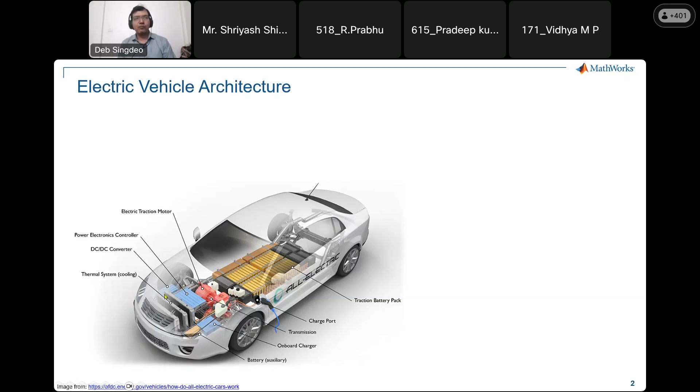Interestingly, one thing we are also looking at is that it's not just modeling the components themselves, but also trying to see how the whole energy is actually transmitted through each and every component — so not just modeling the component, but also looking at how we can model the thermal and other aspects, which are very important to understand the overall performance of the vehicle.

If we represent it in terms of the different subsystems which are there, whatever we talked about now is related to this particular subsystem. We have motor, power electronics, battery, cooling system, but the vehicle dynamics will come specifically from the modeling of the forces acting on the vehicle. That is what we will be looking at today.

Overall, the best way we can test it is to actually create a system level model. Not just the vehicle — we have to combine it with a controller. We should have a model of a driver, and then either we can go with drive cycles, which means that when you take a particular vehicle on the road, it will have a certain velocity characteristic, so that relates to the drive cycle.

In many cases, if we're working with particular test scenarios, we can have those integrated. If we're able to build a model at this level of detail, only then will we be able to capture the system level performance of the vehicle. If we miss out on any of the particular components, chances are that will reflect in the overall performance.

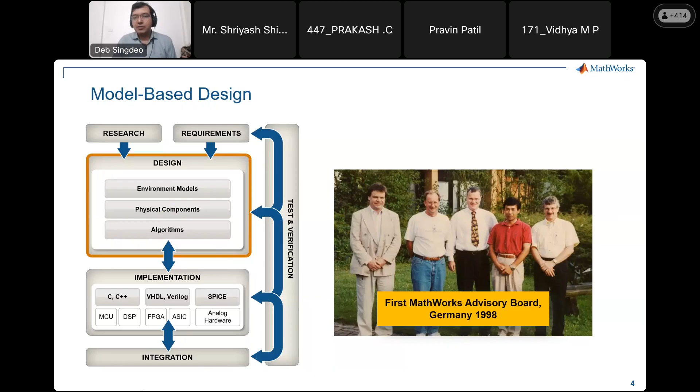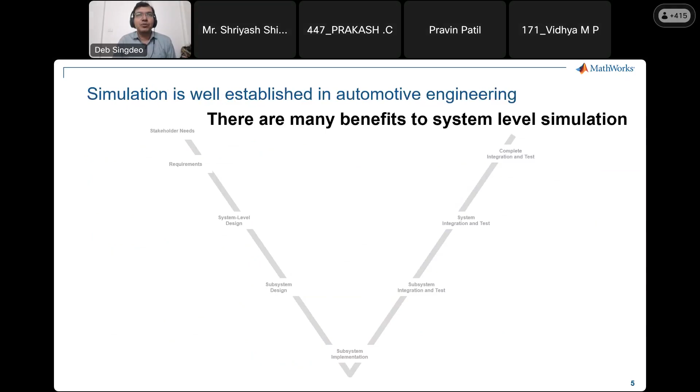What other benefits are there? There are some interesting benefits when you have system level simulation. This is what industries have been telling us. As of now, what I have is the V model, which many industries actually follow. Some of the things is that you are able to understand how a particular system actually behaves. Then we are also able to evaluate different design alternatives. It's not always that one design would be optimal - we can go with different sizes of capacitors, different sizes of inductors. So we can evaluate different design alternatives. Thirdly, we can actually optimize the entire design. Why? Because we are doing system level simulation, and whenever we optimize a design, we just don't optimize a component - we are trying to meet certain overall performance. So that is very important that we do it at a system level.

Along with this, because we are able to see interaction between the different subsystems, understanding how energy is being transmitted between them, where all the losses are occurring, we can understand the different trade-offs that are there when we come to different design choices. And we can also see if the requirement is feasible. So someone might give me a requirement of, let's say, very high performance, at a very limited cost. Then is the requirement actually feasible or not - that's something we will be able to assess even without building that particular vehicle.

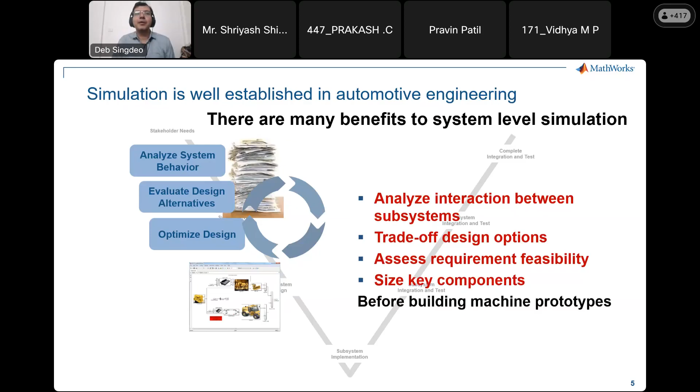I hope the videos actually play finally. Before building a machine prototype, we have to answer a lot of questions. Simulation can definitely answer some, but there are some interesting things we can also learn from those who are using this in the most advanced way. This story is taken from an Italian student body. They participate in a lot of competitions. There they were taking part in a student competition, and what they did was start building certain models first, then tested that particular model in comparison with a real vehicle. Pretty big team, 130 members are there, and over a period of time, their rank actually started to improve when they started using these sort of workflows.

Here, if you see, it's a simulation of an EV track. You can see the vehicle moving about in the EV track. It's known as a skid pad maneuver. So the track moves in a certain way, and they build a model of the vehicle. If you see here, what they're doing very quickly is this is the video of the vehicle exactly on the track when it is moving about. And at the right side, you can see they have overlaid that particular model on top of a simulation. You can see a very good match when it comes to the performance of the vehicle. I will just re-emphasize this part.

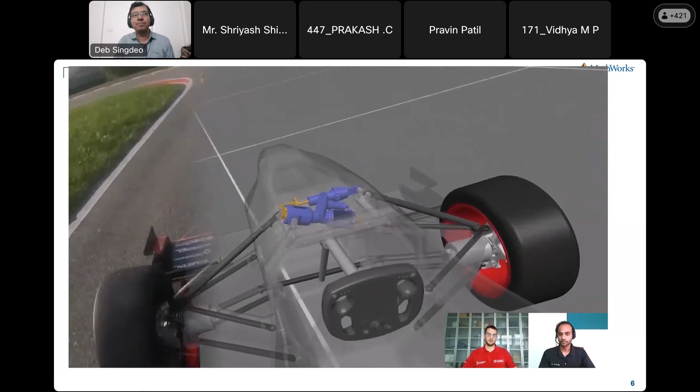So they have taken this particular vehicle on the track. They have used a simulation to see how the vehicle performs on the track. Then they took the real vehicle on the track and superimposed both results. So this is simulation, and this is the real vehicle that they have built. You can visualize how closely they correlate to the performance from the simulation. Exactly the maneuver that we saw, it is executing that exact maneuver here.

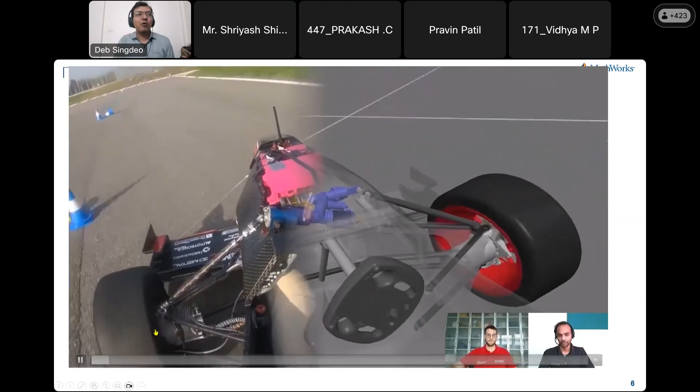So now my question to you is, what difference do you observe? Is it totally the same, or is there any difference here? I'll make a brief pause here. Similarities we can definitely see, but what differences do you think are there? Anyone?

I'll just quickly take a look if there's anything in the chat. No difference, okay, so that's good feedback that there's definitely no difference. It totally matches, so we are very happy. Simulation and experimental results are matching. Nothing like that to convince people, right? Both of them are matching quite well. Anything else that you observe?

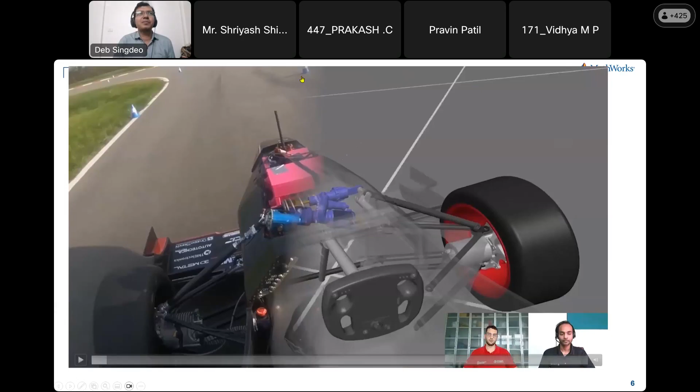You have to observe very carefully, actually. So here I will clarify. If you look at the maneuver, there is not much room for the driver to do much, because it's a very specific maneuver that they're doing. Although different drivers can actually drive in different ways, there is not much of a difference in that way.

So I will add here, if you look very closely, do you see a vibration? Just look at the real vehicle and simulated vehicle. In the real vehicle, see, there is vibration which is there, right? It could be due to the road, it could also be due to the suspension. There is a vibration which is there, and the students were able to measure it with a sensor and quantify how much vibration was there in the vehicle. There was a vertical vibration which the simulation model was not capturing.

So for the students, it's a very interesting learning that, okay, I have modeled only the longitudinal vehicle dynamics, I have not modeled the vertical dynamics in detail. So that's why I see this sort of a difference. Also, if you look at the road, it has a certain tire, and the road and the tire have a certain interaction. That interaction is very critical when it comes to the performance of the vehicle. That is also one of the areas. One of the things is the road and tire model, how you do that is very critical.

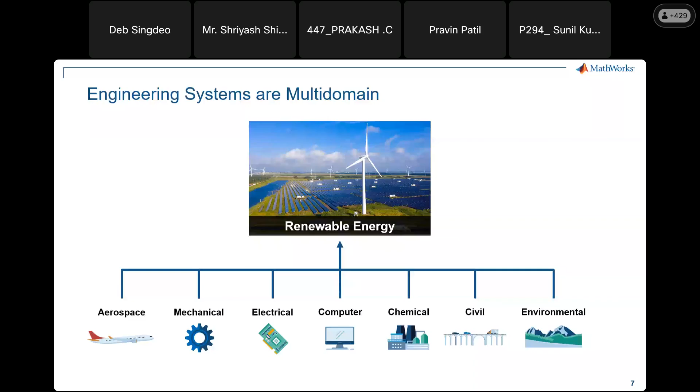One way we address it is to introduce students, faculties, or users to multi-domain modeling using the Simulink and Simscape platform. This way we can take any vehicle model where different domains already exist, combine them together, and determine the performance of the system.

You can already gauge what sort of components the students use for their application. Specifically, they use multi-body, which is quite advanced, but they also use models from the Simscape library, which help them build such a model.

So let's take a step and try to come up with a vehicle model, an EV vehicle model, looking at what these students were using, and try to understand how they build that particular model. The model I'm using today is a simple electric vehicle with longitudinal dynamics.

You can find this model at the link I have mentioned here. I have to see if it will work with older versions of MATLAB, but if you have MATLAB online, this particular example should work fine for you.

The only library I'm going to use here is the physical modeling library, which is Simscape. If you have Simscape at your end, the model will work fine for you. This model is something you can directly access right now if you have access to MATLAB and Simulink, and you can open it at your end also.

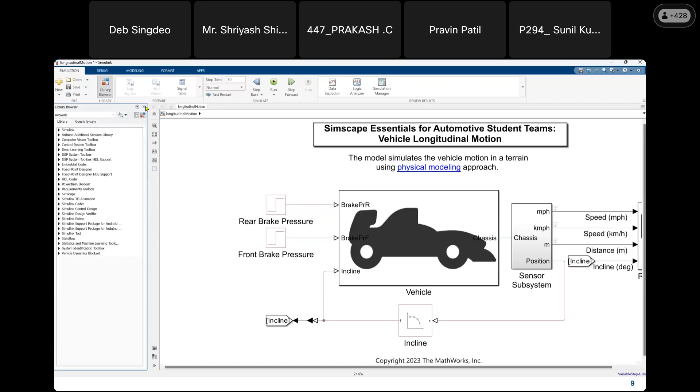Right now, I'm not building it from scratch—it will take a bit of time. So let me just take you through the model right now.

So this is where I have the vehicle body. If I just go inside, I have the brake subsystem and the chassis subsystem. Both of them I have kept here, and both are combined using this shaft that we see here. This shaft connects both of them. Also, there is an option to model the incline.

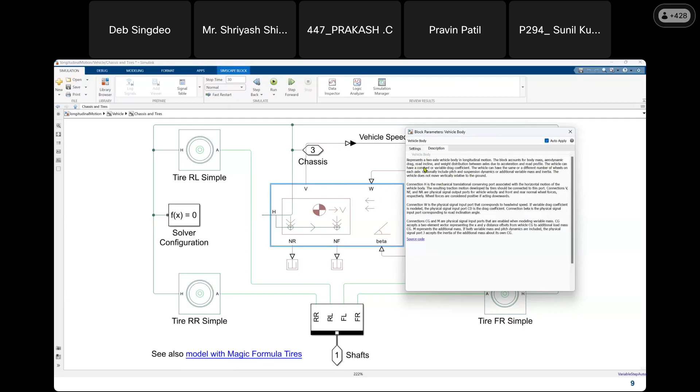We can look at the vehicle body to understand how this actually works. So here, this is where I'm modeling the vehicle body. We can model the amount of wind which is there, and then this vehicle body actually models the forces on the vehicle. If I look at the description, it represents a two-axle body in longitudinal motion. So it will account for body mass, aerodynamic drag, road incline, and weight distribution between the axles due to acceleration and road profile.

In settings, I can see all the different parameters which allow me to model this particular vehicle. I can set the mass here in kg, number of wheels per axle, 1. So it will have 2 axles, we can have 2 here, and the distance of the different axles from the center of gravity. This is the main part. Drag part I'm modeling here, where I model the vehicle frontal area. So around 1.33 meter square is the area.

I have a drag coefficient set here about 1.2. Air density I have taken. And I think pitch and all we have not used here, but if needed, we can have pitch dynamics also.

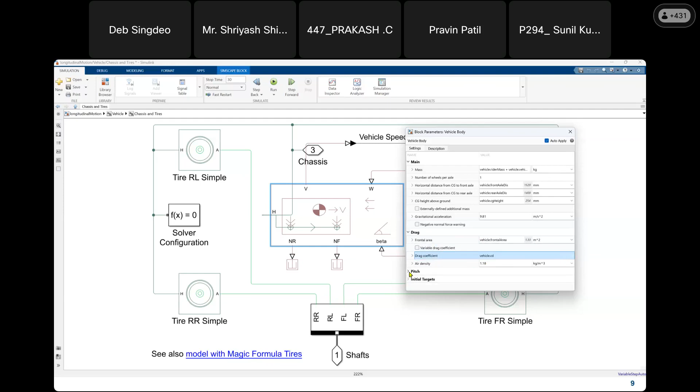So for the vehicle, we are not modeling the normal forces here as of now, but if we want, we can do that also. There is a hub which is there. Each port represents the hub. With the hub, we have connected 4 tires. So there are a couple of rear tires, rear left, rear right, and then I have frontal left and frontal right. So this is related to the vehicle body.

So if we go one level up, this is where we have the braking subsystem. Right now, what we have created very simply is just a vehicle body with the tire, and then we have 4 brakes for the 4 tires. These are, as of now, specifically disc brakes, if I remember correctly.

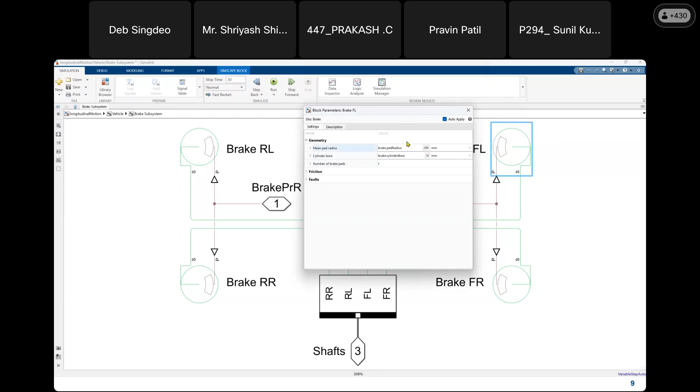Yeah, and we have given the disc brake parameters here. How many brake pads are there? What is the mean pad radius? How are we giving input to the brakes? So all the brakes we have taken, combined them together through the Simscape bus, and we are applying certain forces on the particular brakes. So these brakes have to be, if you see this P port, this applies a certain force on the brake.

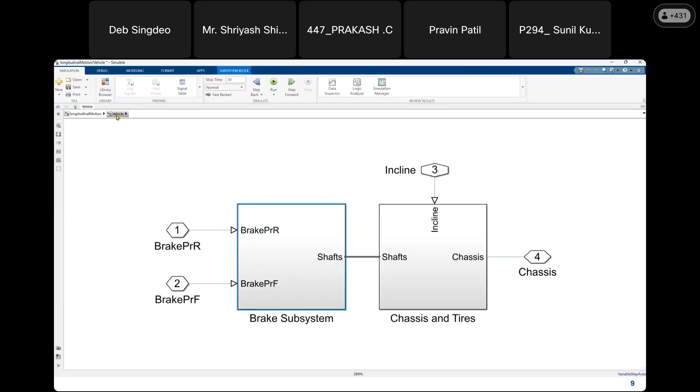So if you go one step up, we see that we are applying a rear brake pressure and front brake pressure. There is a vehicle incline, and then we are trying to see how the vehicle is actually moving about. So this vehicle as of now doesn't have an engine. So it still doesn't have an engine.

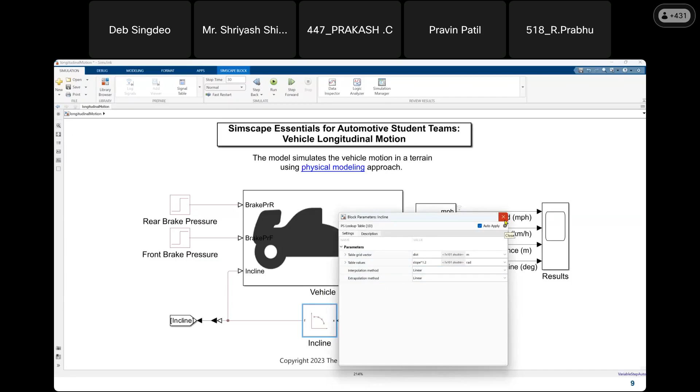We have the vehicle body. We are just putting the vehicle on an incline. So there is a certain slope which is there. What will happen if the vehicle has a slope? It will start coming down with a certain velocity. And then we are applying a certain brake pressure.

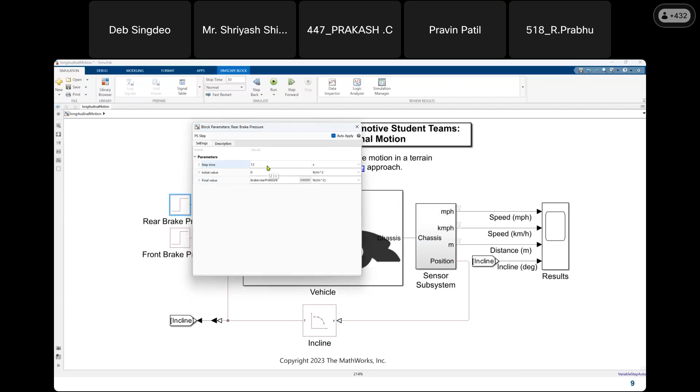So these are, if you see, a step function. At a certain step, around 12 seconds, a certain brake pressure will be applied and the vehicle should come to a stop. So this is a very simple model for us to get introduced to how to model vehicles.

So I'm just running this as of now. And in the result, we can clarify whether the equations we have worked with actually describe the performance of the vehicle like what we get from the equations. So right now it had run the simulation, and the result has opened on a window at my side.

Okay, so that's a very good question. I will come to the question just in a bit. Just give me one moment.

Yeah, so now here I can see the results together. So what I see here is initially the vehicle velocity keeps rising, right? Just let me see. Yeah, speed keeps rising. We have written it in both miles and then speed in kilometer per hour. And then at 12 seconds, we have started applying the brakes. So it reaches a certain velocity, it becomes stable, and then as we start applying the brake, the vehicle starts decelerating and comes down to 0. So this is what we expect from a vehicle which doesn't have any engine.

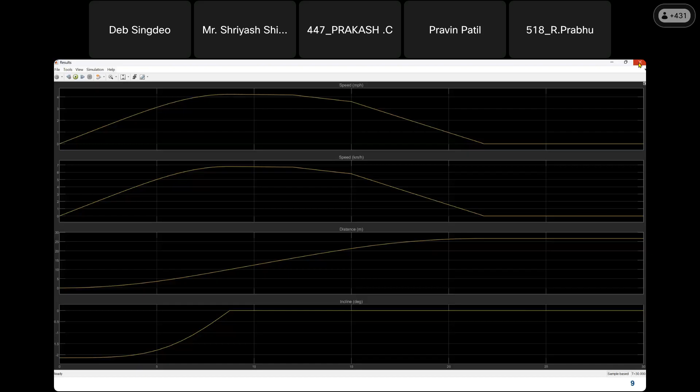So as of now, we have not taken the road profile, we assumed the road has a certain constant incline. But if you have a road profile, you can use a block to import it. What you can do is use signal generator or signal editor. There's a nice block called signal editor. Here we've given it a constant value, but if you have data from a road incline that goes up and down, you can use the signal generator, import from that road profile, and connect it to this subsystem.

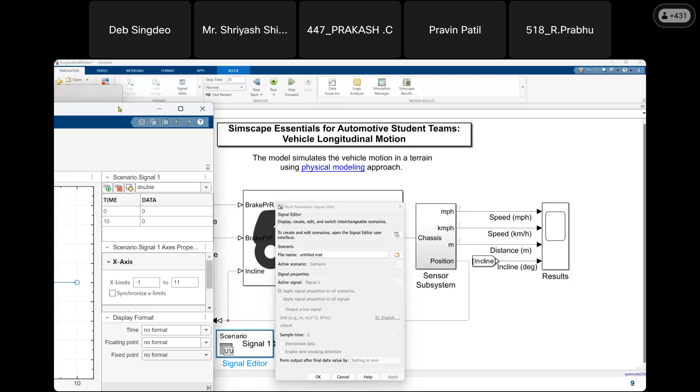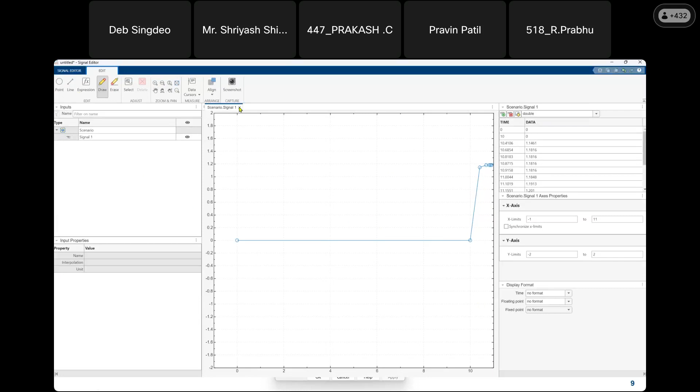Interestingly, if you don't have such a profile and want to test what happens with certain road curvatures, you can edit and create this scenario. The signal editor opens up with an interface where you can create different signals, different road profiles. You can actually draw them too, generate a profile, and then import that data. So depending on what sort of roads you're working with, you can generate different curves and have that profile at your end. It will generate points for you to use in the simulation, so it's very easy to do the road profile.

Now I'll come to the part where our car doesn't have an engine. So what should we do? We can take the vehicle model and combine it with an engine model. How can we do that? Again, the Simscape library browser can help us. I'll show you what I've built at my end, and the same thing can be replicated for this sort of model.

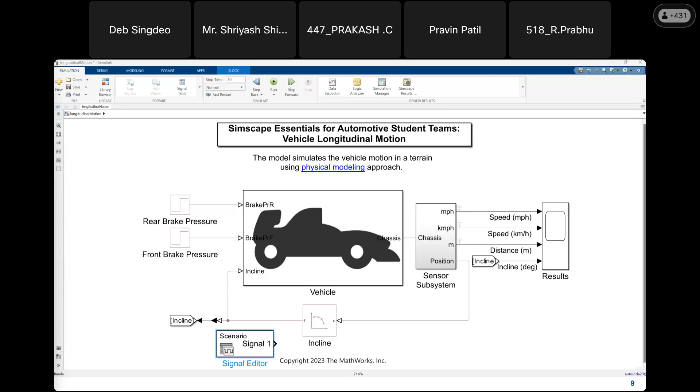Let me quickly open up another model to show you how you can include that part also. By the way, if you download the example I talked about, which I just shared from the GitHub page, it will have folders like this. The one example I just showed is part of the longitudinal motion. The second example talks more about the electric powertrain, how you combine it with an electric powertrain. So I'll open up that model now. Okay, it has opened up here.

So till now, what we've built is just the vehicle model here, right? In the last example, this is what we built. Here we are applying a braking pressure, but to ensure the brake moves, if you look inside the vehicle body, we've made two different changes. This is what we built before, only the vehicle dynamics, with brake pressure connected to that. But now we have our drive shaft which is there.

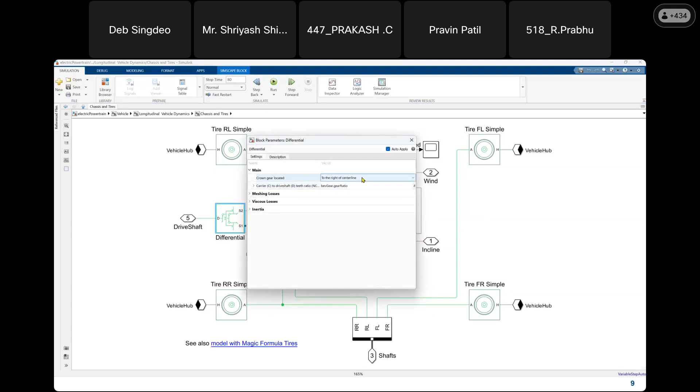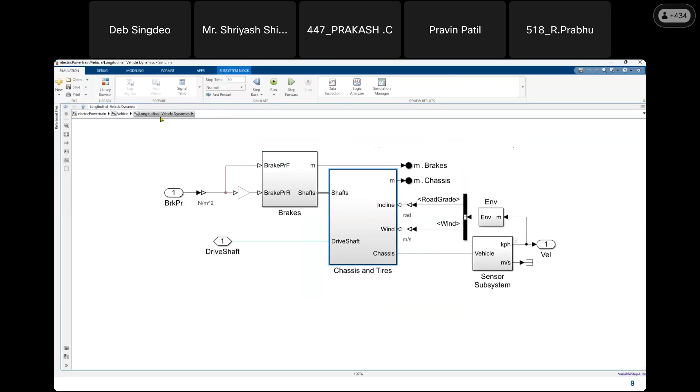Here we have taken the two different tires, and if you look, we have a subsystem with a torque sensor connected to a differential. We have taken a differential with the drive shaft teeth ratio and crown gear defined here, and using this differential we combine it to the drive shaft. This drive shaft is then connected to the electric powertrain, where I have the electric motor here.

So here I have not gone into detail and modeled an entire electric motor. What you see here is a motor and drive at the system level.

If you look here, this is powered by a battery. I have a battery block here from the Simscape library, and I'm measuring the SOC of the battery also. This is something we are very interested in, what is the state of the battery when it moves through a certain path.

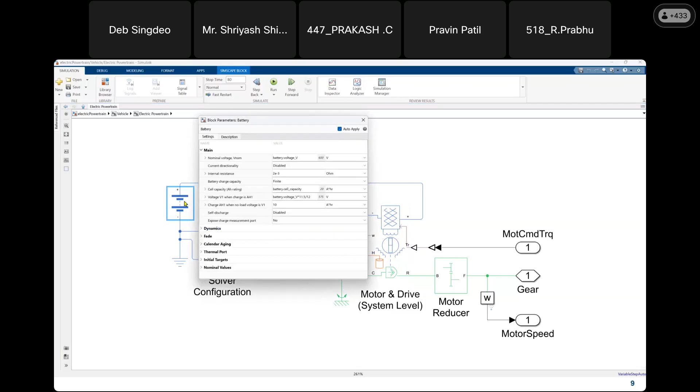Connecting the battery with the motor, we cannot do it directly. We need a converter, so we have a DC-DC converter. Why? Because the battery has a certain voltage, and the motor will have a certain output, so we have parameterized it by the maximum torque and power. This DC-DC converter ensures we are able to meet the requirements of the motor. The motor will have a certain DC requirement, and that voltage requirement we are meeting by using this DC-DC converter.

The motor, if you see, is a nice example of a multi-domain system. It has electric components you see in blue, related to the circuitry and the magnets. The green part refers to the mechanical component. There is energy being transferred from the electric circuit to ensure the rotation of the motor, to spin the motor, so the angular conservation principle is applied here.

What I have here, if you look at the orange component, this is related to the thermal part of it. I can see this option that says show thermal port - this models the thermal component of the electric motor. So by definition it is a multi-domain component, but thermal I have not gone into a lot of detail, I am just insulating that particular motor here.

If I want, I can also model the different mechanisms by which this motor will transfer heat to the surrounding. If I want to model a conductive element, I have to have a conductive heat transfer block. If I want to model radiation, I have to have radiative heat transfer, and all of them have to be combined together if I want to model that sort of thing. So if I want to model other characteristics, instead of insulated I would have to connect them to this particular model with multiple modes, and then reject this heat to the atmosphere, so then I can have a temperature source. This is how I can actually model any sort of thermal component.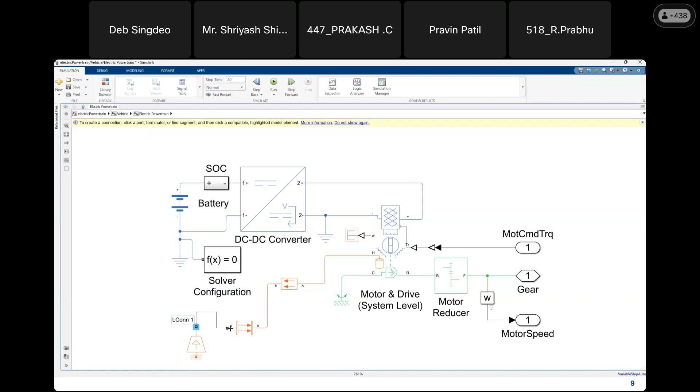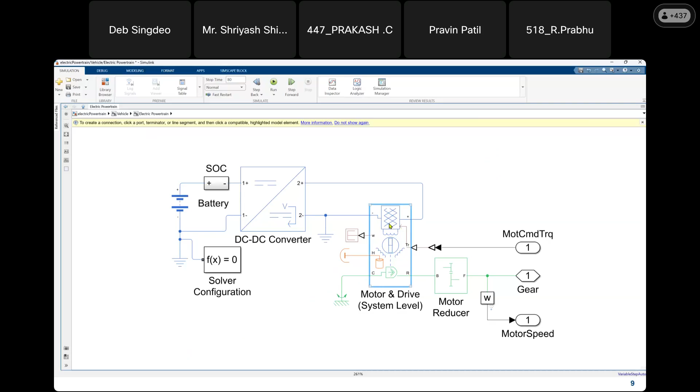Just to simplify things, we have made it insulated so that we can see the motor temperature rise, but you can model different thermal behavior also following this sort of approach. So here, what are we modeling? We are modeling the motor and trying to see what sort of torque it is generating. We have a motor reducer here, connected to the gear. The electric part we have modeled, and the thermal part also we have modeled.

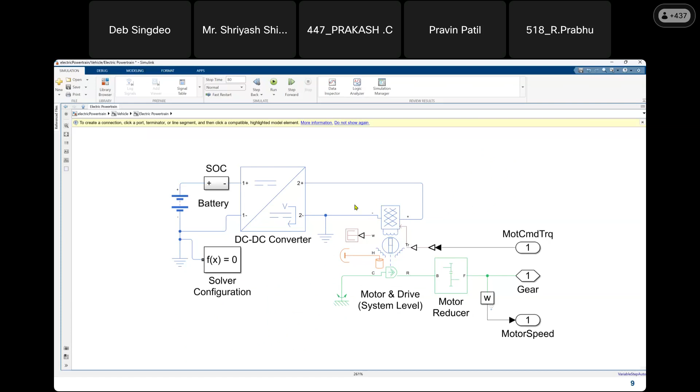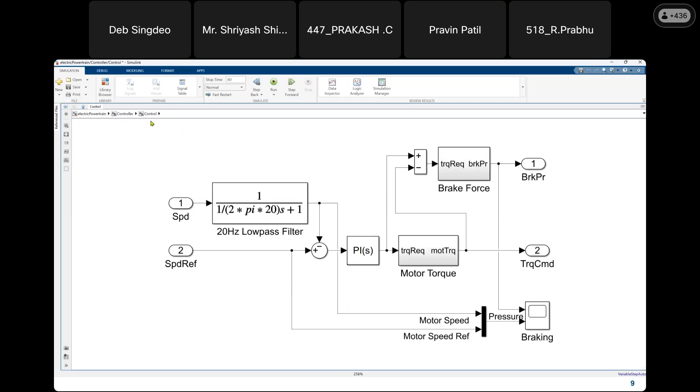So now we have an electric vehicle connected to the vehicle body, and then we can simulate. We have given it a certain drive cycle. The controller part, I'm not going into more detail - it's a very basic controller we have used, I believe just some PI blocks. There is a certain motor speed reference, we are just converting it to torque.

Basically we have a drive cycle source, meaning vehicle velocity changing with respect to time. Whenever it is accelerating, I will take it as the wheels going to spin faster, so I will convert the motor speed into a torque command and try to meet that. Whenever it is decelerating, I have brake pressure, which I also try to use the controller to meet. So this is how it actually works.

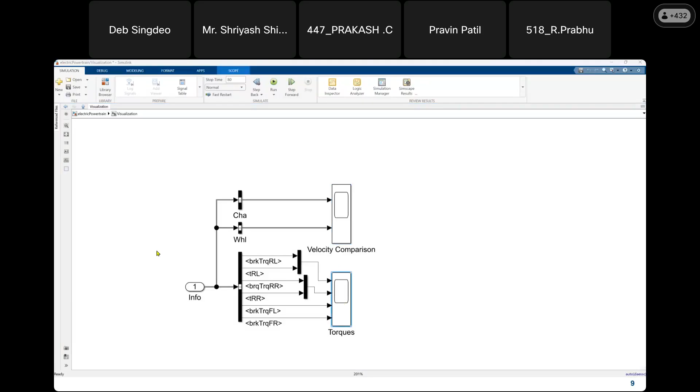Similarly, torque also we can compare, how the vehicle is able to meet the different torques, and we get a curve like this here. So torque on the rear left, brake, drive torque - all of those parameters we can see closely.

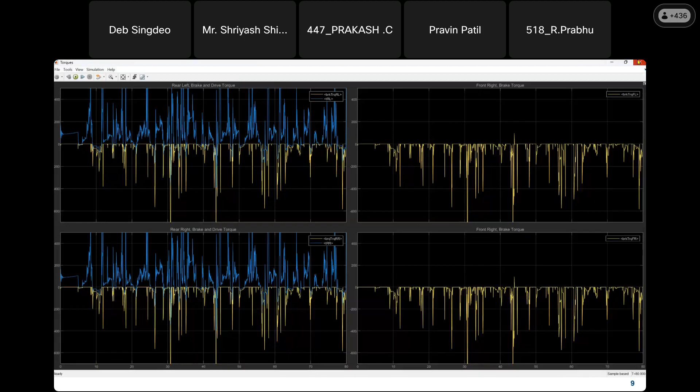So this is a very simple example of how we can do a full-scale electric vehicle model with the full multi-domain capabilities which are there, and then visualize the result at the same place.

Okay, what next from here? What would be the next step once we do something like this? You have to make a guess. What would be the next step? What have we missed here? I showed you some visualization. What did we miss?

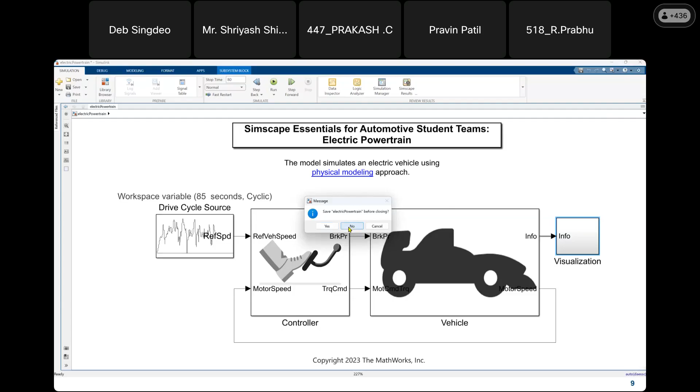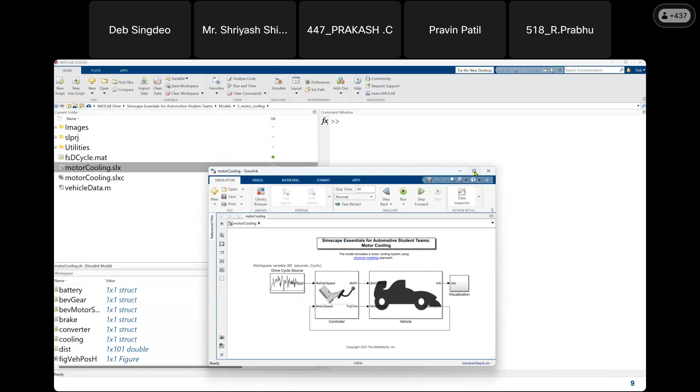This is not something I'll get into in more detail, but for a closer scenario, I can show you that people actually model the motor in more detail, and then try to see how you can model the motor cooling system. So I was talking about this before. You can model the different conduction, convective, radiative capabilities of the motor. In many cases what we'll see is that the motor temperature also rises when we have a vehicle running and you don't have enough coolant.

So here we have a model of a tank which has a certain coolant fluid. There is a pump which will pump this fluid through certain pipes, and then it runs through the motor. The pipe runs to the motor, takes the heat from the motor, rejects that heat to the surroundings, so we have a heat exchanger here. Then we try to see what is the temperature of the motor. These are studies which give us a very good idea about how to optimize the vehicle performance coming from the thermal side.

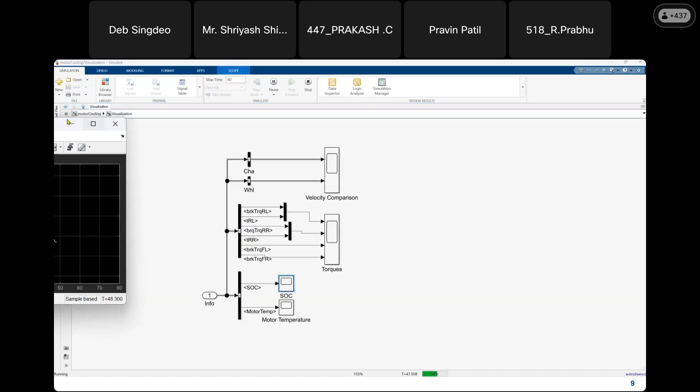If you do this sort of study, we would be able to also visualize the temperature of the motor. So very quickly, let's go through this one. Here we are basically seeing, in addition to whatever we have seen, what is the SOC. So we are trying to cool the motor, right? Where will the energy come from? When we're trying to cool the motor, the energy will also come from the state of charge of the battery itself. So the state of charge of the battery will also drop when you are trying to do cooling of the motor.

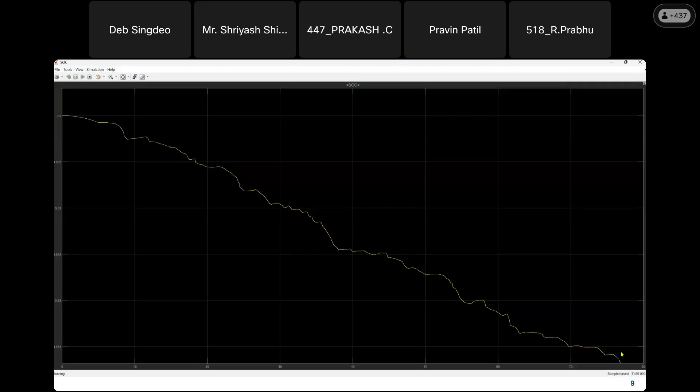So here we have a plot of the state of charge of the battery, which is falling with respect to time. And then we can look at the motor temperature. We expect that the motor temperature, if you see, initially shows somewhere near room temperature, but then it rises, goes very close to 100. But because we have a coolant system which switches on when the temperature goes to 100, the motor temperature comes down. Again it goes near 100, the coolant switches on, the motor temperature comes down.

So we can create different algorithms to optimize that - okay, my motor has, let's say, a threshold rating of temperature given as 100 degrees, so I have to build controllers to ensure that the motor temperature does not reach 100 degrees. Or somebody can give me a temperature range in which my motor operates efficiently, then I have to design controllers to ensure that the motor operates in that particular region. So these are the things that I can then focus on.

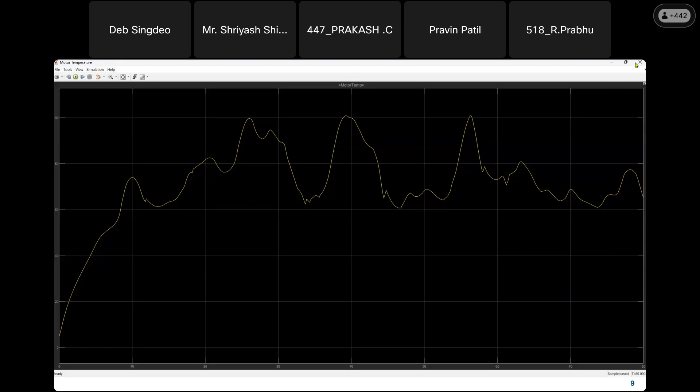This does not mean that I'm just going to focus on motor only. One important characteristic for an electric vehicle is the electric powertrain and motor model. As of now, I've used MATLAB version 2024B, but it should open with earlier versions if you have Simscape.

Right now I have a thermal model for the motor and drive. I can also have a thermal model for the converter, and the BMS can be modeled too. If I go to Simscape, I can access these blocks. This one doesn't have a thermal port, but I can show the thermal port, so I can model thermal components of the mechanical and electric converters, and thermal aspects of the battery as well, giving it a thermal port.

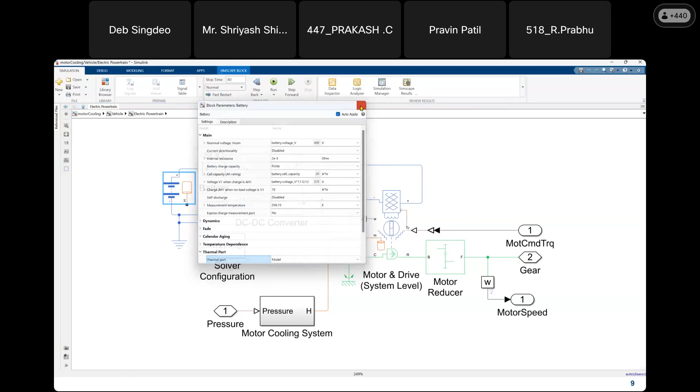The more accurately I'm able to model that particular system, the more accurately I will be able to measure the SOC of this EV when it goes through a particular maneuver or drive cycle.

To model battery aspects and the BMS, the library you need is also part of Simscape. I'll point you quickly to that. Just go to Simscape - there's a dedicated library related to batteries now. You can model them starting from single cells; we have multiple libraries for modeling cells, a table-based battery model, and also very detailed battery models. For BMS, we have components that allow you to estimate.

We can estimate the capacity, filtering. There are multiple SOC estimators: adaptive Kalman filter, adaptive Kalman filter with variable capacity, Coulomb counting. Whichever method I'm using, I can use these blocks to do these things. You don't always have to create the entire algorithm, although it's good that you can create your own algorithm and benchmark it against these blocks - you can use these libraries to do that.

For a bigger battery, you can do cell balancing - we have modules for that. For current management, we can implement CCCV charging and discharging, and we can have protection also - different sorts of protection we can ensure we can use.

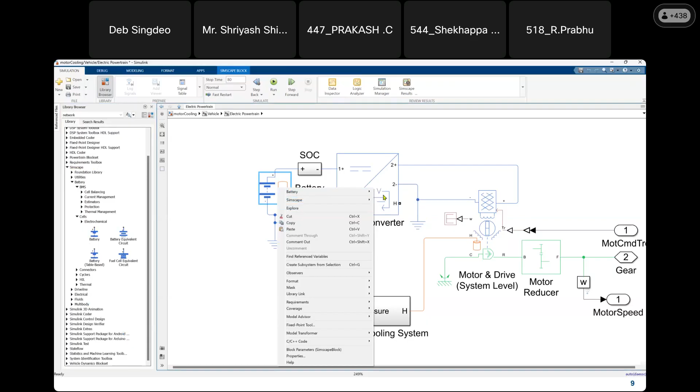If you're working with battery and want to know more, you can go and look at the help document. You'll get a lot of examples which will give you some idea about how to use that particular block. Now I will show you some advanced things compared to this one.

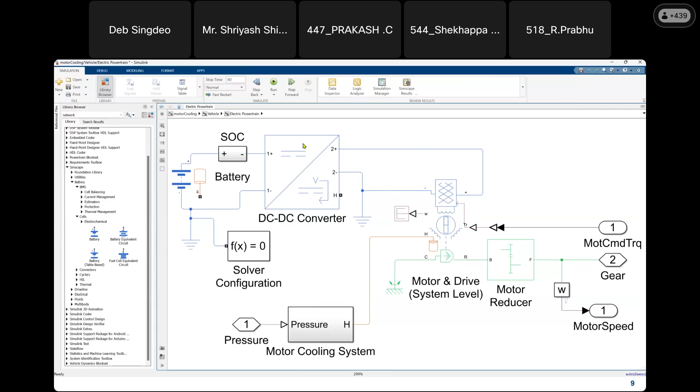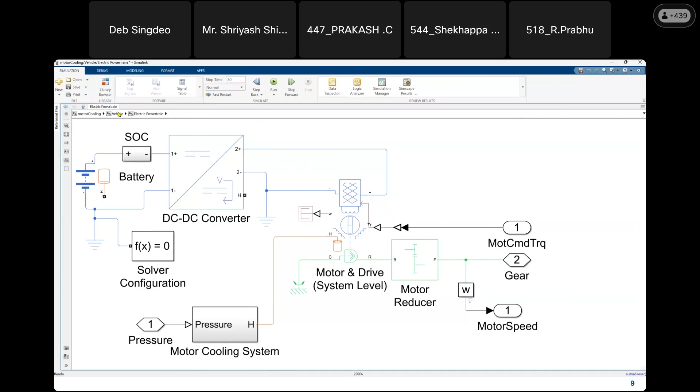This will allow you to model a multi-domain system. Right now, whatever we have done is still a longitudinal model that we have used. So now the question is how to take this and go one step above.

I'll just close this. I will share a couple of slides and then we will look at some more examples.

I will share the resources for you - I think most of the things are already there. Specifically, right now whatever we were doing is related to longitudinal modeling. We can also model the vehicle body at different fidelities - we can model 3 degrees of freedom, or we can have 6 degrees of freedom. There are two ways we can go about it: either we can write the equations at our end and do that.

But specifically for MATLAB, we have libraries that also help us do something like this. There is a whole library of different approaches for modeling the vehicle body and sensors. We can look at that to go ahead.

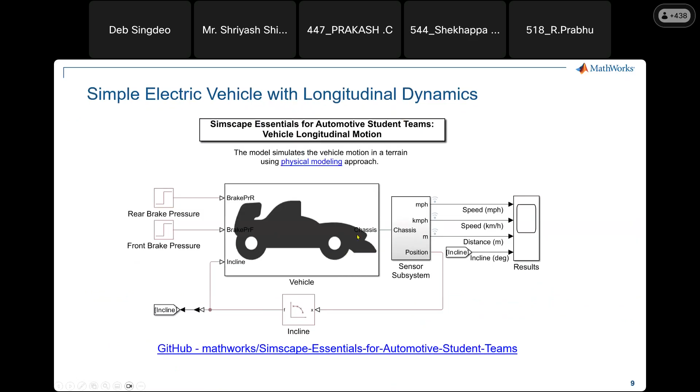So right now we work with this. This was the longitudinal dynamics. This is the simplest way we can go about it. We also have blocks that allow you to model the entire vehicle body and sensors at different fidelities.

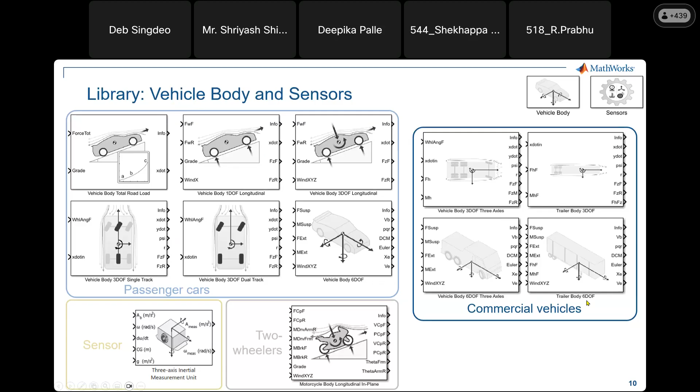It's very easy for us to go with four-wheelers, or we can go with two-wheelers where we have motorcycle, or for commercial we have existing blocks that model equations for vehicle body with 3 axles, trailer bodies, vehicle body with 3 axle, 6 degree of freedom. Multiple of these blocks are already there. We can directly take them and model the vehicle body.

We can take the learnings that we have and combine them together. We can take either a simple vehicle body, or 3 degrees of freedom of the body model. We can combine it with steering, with a system model, with a transmission. So here we have combined multiple things together, and we can combine 3D scenarios also.

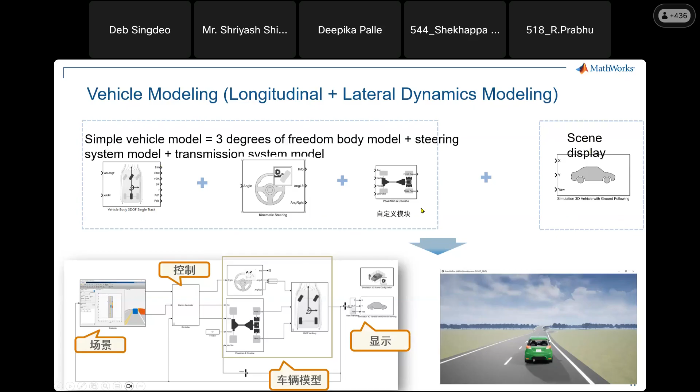MATLAB very closely connects with Unreal Engine. We have support for Unreal Engine, where if you combine these things together, you should be able to do what you have here. We can have different sort of scenarios that we can test in a 3D environment.

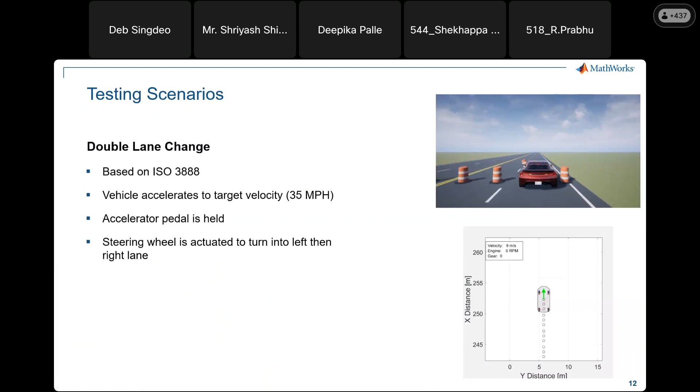The maneuver that we see here is a double lane change maneuver. These are the scenarios which we can actually implement if we go by this way. So there is a double lane change and those things is something that we can try.

This is based upon a different set of library, by the way. The library that I'm talking about now is known as the vehicle dynamics library. So where can I find it? If I'm trying to install anything separately, there is an add-on manager here, get add-on. So all of these libraries separately, if you want to explore, you can find in the add-on explorer.

Meanwhile, as it opens, I will just let it open, and I will just open the model also at my end so that we can quickly have a check with that. I will just show something here and then I will show you the libraries also. Let me just check if the library has opened.

Add-on explorer is the place where you go and search for the libraries. It is available in the older versions of MATLAB also. I am using this add-on library from somewhere like 2019. It should be there. So previously we checked with Simscape.

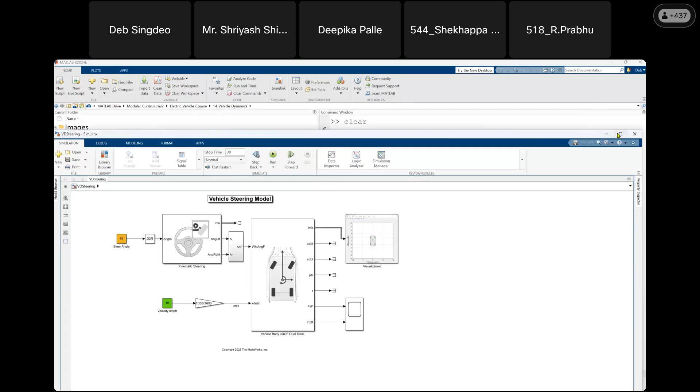So now I have whatever I've shown before for the simple scenario, I have built something very similar, but now the fidelity has changed. So now I don't have just a longitudinal dynamics. I have a 3 degree of freedom vehicle body that I'm using here. And then I have a vehicle track also, a dual track.

I have defined the different forces. External longitudinal velocity is what I'm giving. I can define different external forces here. Vehicle parameters I can give longitudinal. I can give the lateral also.

Okay, so I can parameterize it both from longitudinal and lateral point, aerodynamic and all, we have already seen before. This is something that we can do. And here, just for a simple scenario, we have connected a steering to this one, kinematic steering. We are providing a steering angle and we are just trying to see how the vehicle is actually moving.

Okay, so if I just run this, it is running the model, it is compiling everything. And then in visualization, I can actually see, okay, it has opened visualization on my side. I'll just quickly run it again. We can see how the vehicle is actually moving over a particular track. Okay, so it is animating at my end only. So it is showing the entire animation and the track also, it is showing how it is actually moving about.

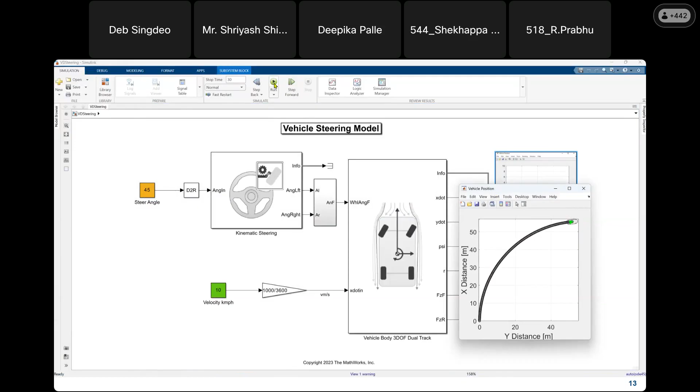I don't know how to actually ensure that it runs at your end. Okay, I know one way. Let me make it 100 seconds, then I think it should work. So here you can see it is just moving about in a circle. So we are able to, if we connect this with the 3D Unreal Engine, we should be able to see that particular behavior in a 3D environment also. So that is also something that is possible with an approach like this.

So coming to the second part, this is again like a higher fidelity model, and this is something that industries do a lot also, still at a system level, and we can see the performance of the vehicle. Here we have just put kinematic steering, but here we can also have different sorts of steering, different sorts of parameters. So those we can do.

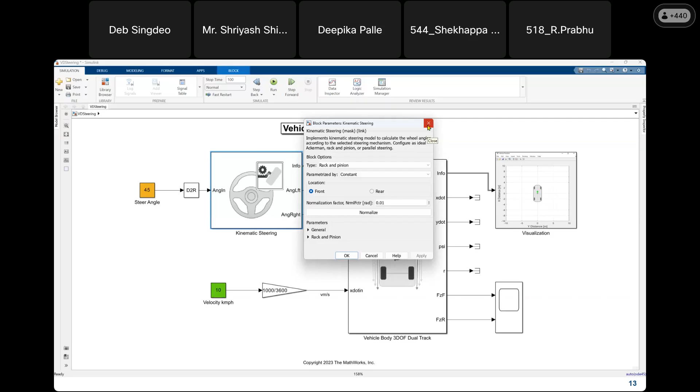So Simscape Multibody will allow me to work with different assembly models in CAD, add physical tire, steering rod, test bench modules, and then I can run them and visualize how the vehicle is actually going to move on the road. Okay, so this is a possibility, and this is also something that we see interest in both from students as well as industries nowadays. So there are some examples that you can actually explore a bit more. Probably I can link them with you later.

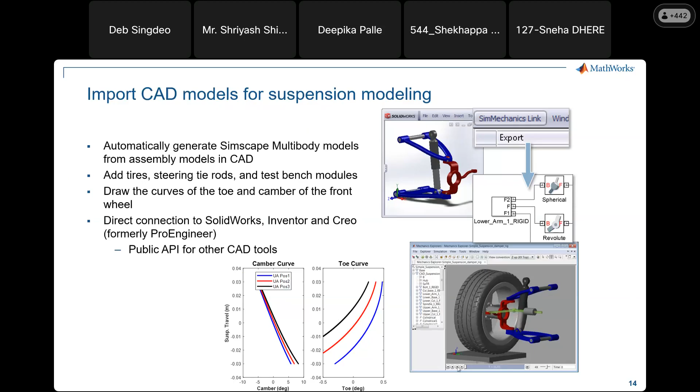So there is a question, are there any libraries available for drones modeling? That's a good point. We have a UAV library. Just like the add-ons that we just saw, not to go far from the agenda here, but I will just quickly show you that there is now a UAV library which you can access from the add-on explorer, and using that you can model UAVs also, and you can also visualize them in a 3D environment and see how those UAVs actually behave. So I will just quickly show you that and then I will go ahead.

And this is pretty good also in terms of teaching, I would say. So we have a UAV toolbox. Using that, you can actually model UAVs very easily. I've not installed it, but you have UAV toolbox. And if you're using a specific PX4 autopilot or different drones, then we have also something that will allow you to control them. Okay, so that is also there.

Now I will show you one very interesting thing that we have. You always need not build something from start to end. There is a virtual vehicle composer app from which you can very quickly build this sort of models. Okay, how do we access the app? At the very top of MATLAB, there is a place called apps. This is where we can go and access this particular thing. So in 2024B, I have apps here at the very top. Just search for the virtual vehicle composer app.

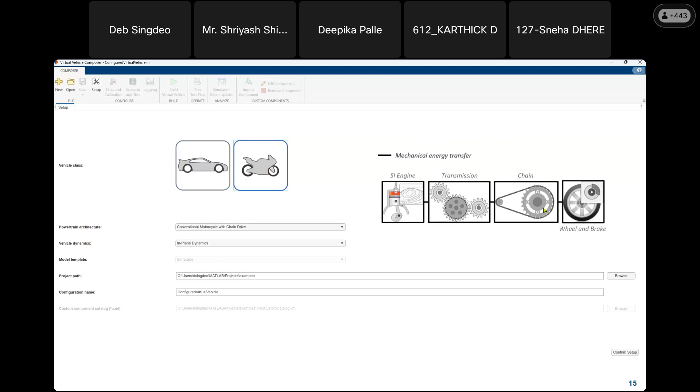It will enter a setup screen where it will ask what sort of vehicles I have. I can go with four-wheeler or two-wheeler, and accordingly it will configure the components it will use. Let me just go with four-wheelers for now.

I can also choose the architecture conventionally. Here, I can go with one electric motor, giving either front wheel drive or rear wheel drive. Or I can go with two electric motors, with dual front or dual rear setups. So different architectures I can actually select.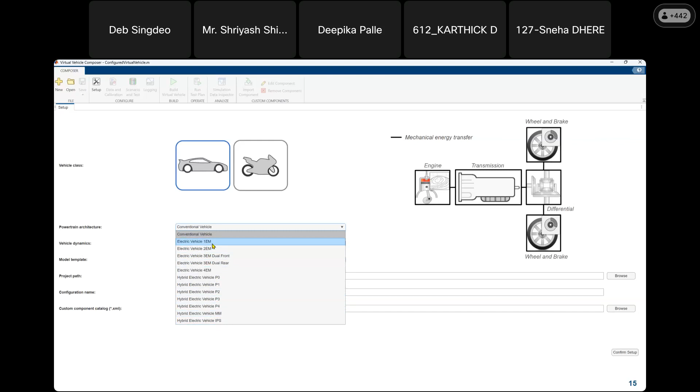Let me go with the simplest one, electric vehicle with two electric motors, something like this. It is showing me how the architecture is: I have four wheels, a battery, one motor connected to the differential spinning the front wheels, and one motor spinning the rear wheels. Now I can choose which set of libraries it will use.

Just give me one moment. So I can choose here what sort of libraries I have.

Should I only go with longitudinal, or should I go with combined longitudinal and lateral? Okay, just give me one moment, I'll take a call quickly.

Okay, so I understand we are nearing perhaps dinner time, so I will not take a lot of time from your side. I will just quickly give you the way this works.

You can identify what you are looking for, and you can choose which set of libraries it will use. Then if you just go to the next stage, it will take the configuration you have chosen and take you to a screen where all you need to do is parameterize everything, and very quickly it will parameterize and generate the model for you at the back end.

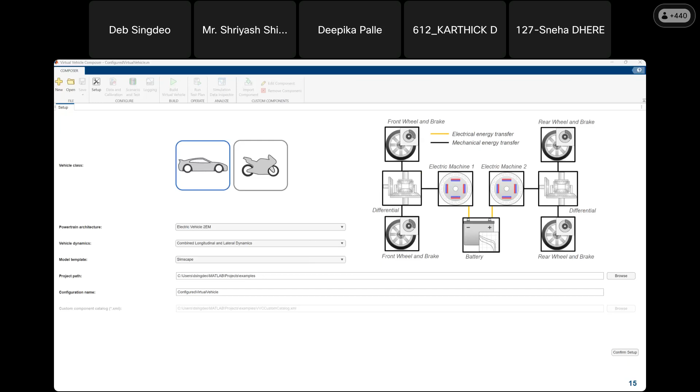So here you see it has taken whatever inputs I have given, and it will build the model. I'll just show you an animation of how this works so we can save some time. Again, just to quickly show the virtual vehicle app, it will open up something like this.

We can create a new thing, select the type of model we are working with, a vehicle, select the sort of powertrain architecture, select the different dynamics library - we can go with Simulink or Simscape - and then if we just say go ahead, it will create the entire vehicle model for us.

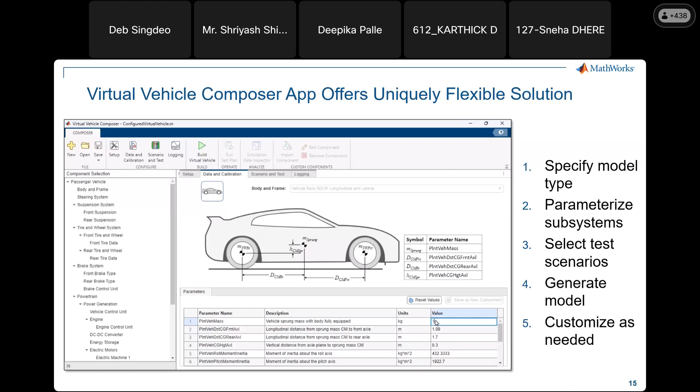We have to parameterize and identify the values. So for each of our vehicles, we will have different parameters. Ideally, you can think of this like it's taking the entire equations, connecting them together, and we are giving it the values of those particular parameters. Once we have done that, it will create the entire model for me end to end, and then I can very quickly go and change components also and visualize them.

Once we have done everything, we can create scenarios to do testing. We can have just steering scenarios like what we saw, we can have 3D scenes also, and we can create this sort of test to test that particular vehicle in different scenarios.

So as of now, for this, you cannot create 3D solid geometries - that we have to do on our own. This will create everything from equations right now, so it will create something like this with all the components connected together. This doesn't support the 3D solid one; that we support separately.

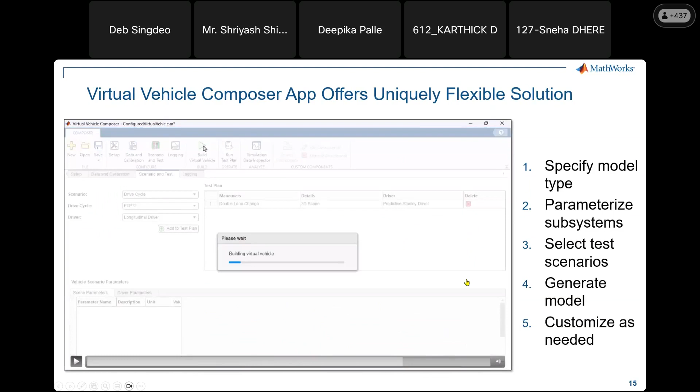But even here, whatever we are creating, we can use a 3D environment and test that particular vehicle model, because in the end it's equations only, and it will have a certain behavior that we can visualize here. So even though we have not created a 3D solid assembly, it will take the Unreal Engine, take the vehicle models which are already there, and that we can visualize.

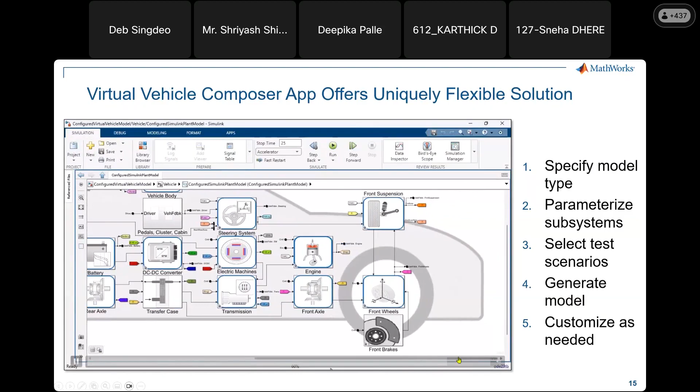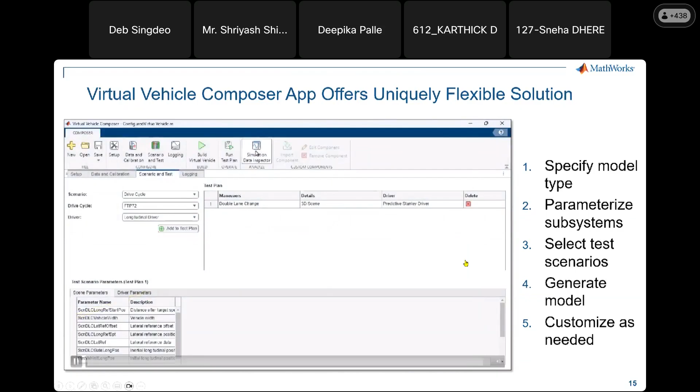And then we can go back and customize it as we need. Similarly, if we have our own 3D solid geometry, we can bring that in from SolidWorks and go ahead from there. It won't change much, but this part as of now is not supported by the virtual vehicle composer. Okay, so with this, I will stop here.

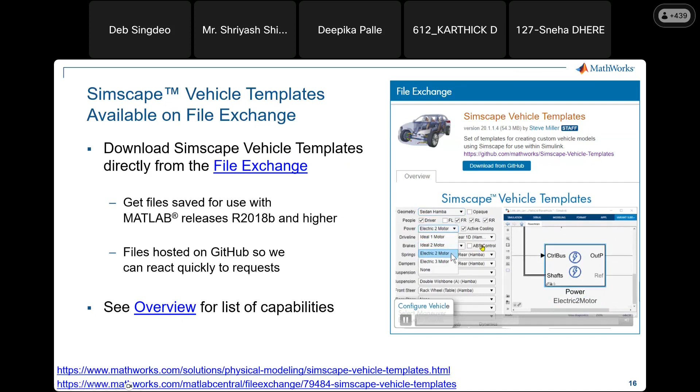In many cases, what we can also do is use some vehicle templates. So in Simscape, let's say if you're not just working with a two-wheeler body, but working with trucks or a bus, then from the Simscape vehicle template you can go and select that sort of vehicle you are working with, and then look for the maneuver in different sort of environments.

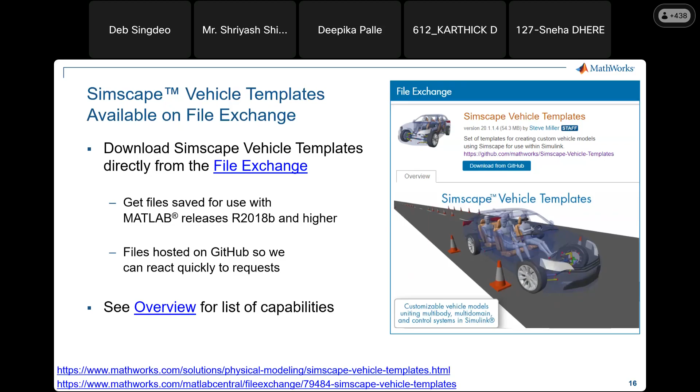This helps you go from a requirement to a system-level simulation within minutes, so we save a lot of time. And all of this is freely available to you, so it is not a black box. You can go inside, change components, bring in equations, create your own specialized components, and carry out testing. So you save a lot of time here.

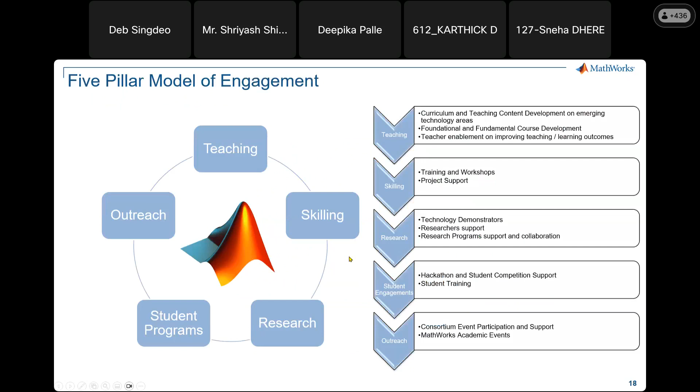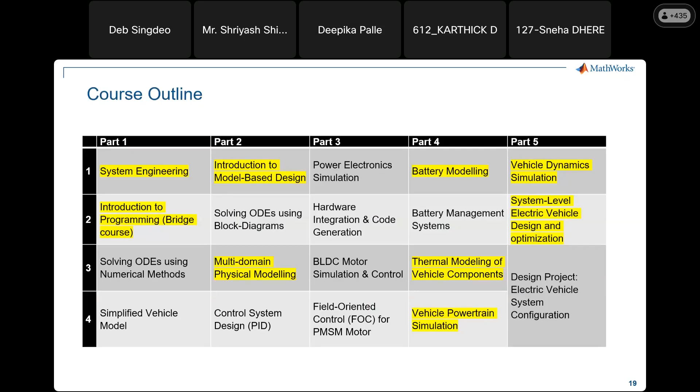At MathWorks, we interact very closely with industry, researchers, and education. All of us have different things to look at, but we are very happy to support different initiatives in this area. We also now have an EV curriculum where you can model an EV end to end. If this is of interest, please feel free to write to me. I'll be happy to share what we have, and depending on your use cases, you may select particular components for your courses.

So if you're unsure which toolbox you have and which you do not have, one thing you can do is type the command VER. If you hit enter, it will tell you all the toolboxes that you have.

So specifically for the use cases we saw today, we were using Simscape along with related libraries such as battery, driveline, electrical, fluids, and multibody, and we also saw the Powertrain Blockset. So if you have these libraries, everything I showed today should work at your end, sir.

If I missed your college name, sir, could you please repeat? Central Institute of Petrochemical Engineering and Technology, CIPET. Okay, I know CIPET, sir. Jaipur. Okay, CIPET Jaipur, okay sir.

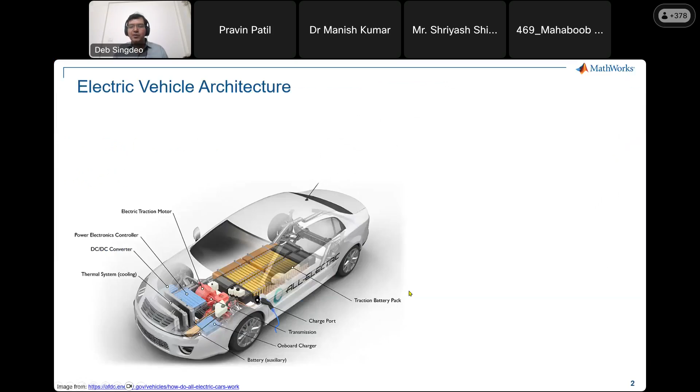Is it only enough for four-wheelers, or can we also design other heavy loaded vehicles? I did not show the entirety of it, but we have templates with which you can model any vehicle. We have something known as the Simscape vehicle template, where you can model not just two-wheelers, but also buses, trucks, and so on.

So I will post the link for you. There are templates using which you can model different vehicles, and we have examples for that. If you want to build it from scratch, that should also be possible, including modeling each component individually. But there's this template created by the MathWorks team that has different sorts of vehicles you can model in detail.

Okay, thank you, sir. So here you can model trucks, trailers, all of those things. Yes, thank you, sir.

So I hope all the doubts are clear. Given the time, I will not stop you from going ahead with whatever you have planned for now. So let me do one thing: whatever resources I've shared, I will collate everything and share with the organizers along with the PPT. Please feel free to reach out to me if you have any doubt or are interested in curriculum related stuff, I'd be happy to connect with you directly. So with this, I will end today's session.